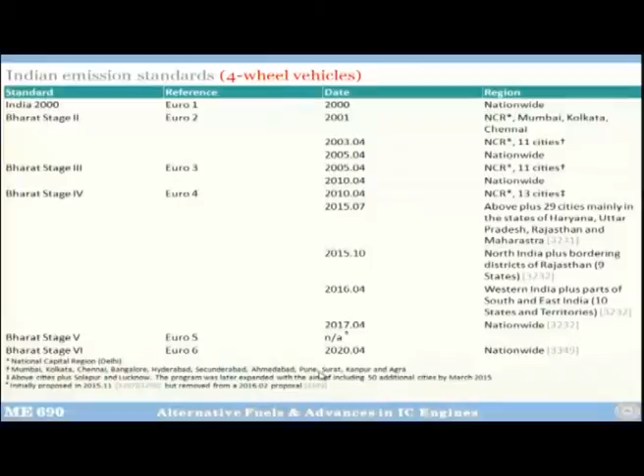So if you look at the cities—these 11 cities include Mumbai, Kolkata, Chennai, Kanpur, Agra—and then there were 13 cities. These cities plus Solapur plus Lucknow. So we were earlier than Lucknow. Okay, so this is as far as the four-wheeler program is concerned.

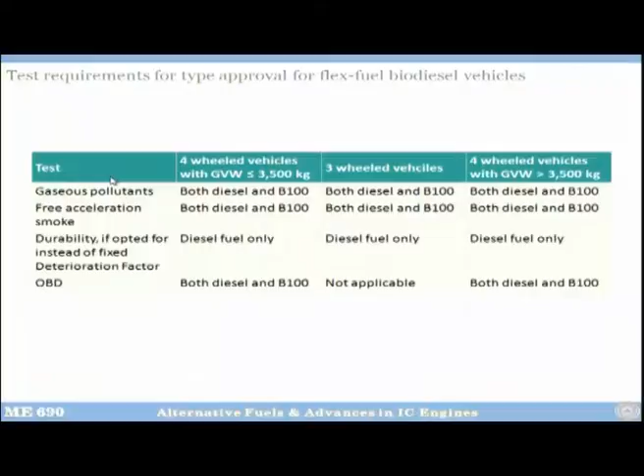Now, test requirements for type approval for flex fuel vehicles. Type approval means that before vehicles are put into the field, certain tests are done: gaseous pollutant tests, free acceleration smoke test, durability test if opted instead of fixed deterioration factor, and onboard diagnostics. For four-wheelers, if it's a flex fuel biodiesel vehicle with weight less than 3,500 kilograms, it was tested for biodiesel and diesel, with durability test done only on diesel and OBD on both.

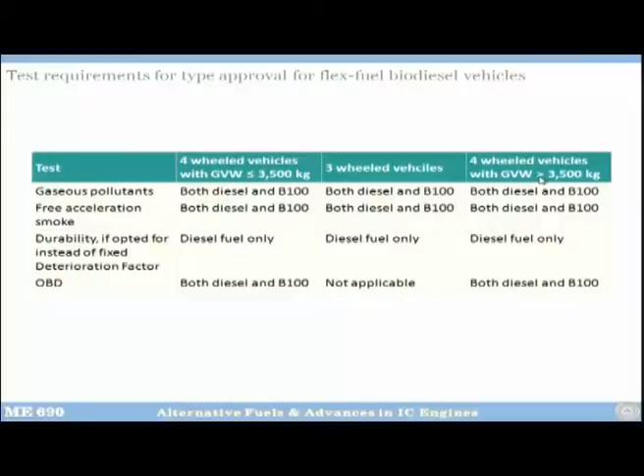For three-wheelers, only two tests were done for diesel and biodiesel, with durability done only for diesel, and OBD was not applicable. For four-wheelers with gross vehicle weight more than 3,500 kg, three tests were done on diesel and biodiesel, and durability was done on diesel. So this is the type approval test. It's not of great academic interest, but in the automotive industry you will hear this term 'type approval test' all the time, so I thought I would introduce you to it.

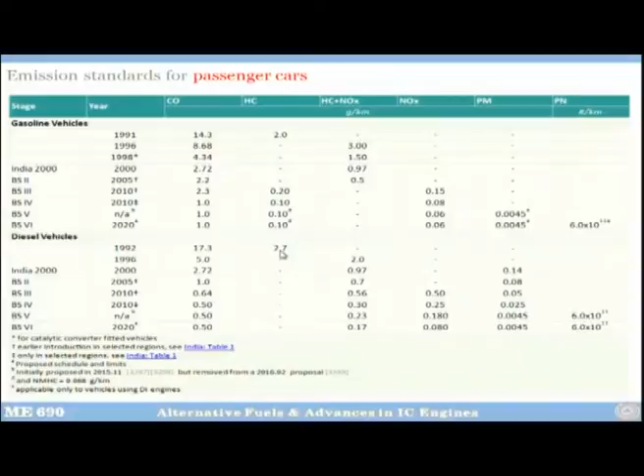Look at diesel: this is 1992, 17.3 and 2.7. In '96 you reduce it to 5 and HC plus NOx is 2. In 2000, 2.72 and 0.97, and this is particulate matter 0.14 gram per kilometer.

This is BS2, reduced to less than half, anyway it is a very small number, and this reduced to 0.7, this you reduce to about half. 2010 BS3: 0.64, 0.05, you see this reduced to a very low level, and BS4: 0.5, 0.3, 0.25 and 0.025.

And BS6, same CO, HC/CO is not a problem anyway with diesel, very small numbers. HC plus NOx is 0.17, NOx is 0.080, so very small number, 0.5 to 0.80, and this is 0.0045, and here also particulate number is introduced.

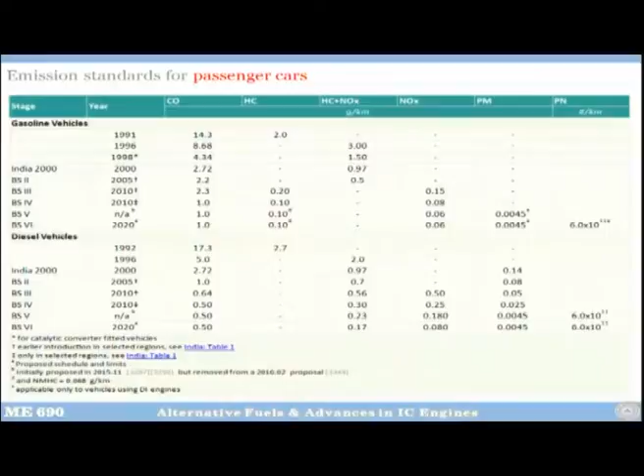So this is what is going to give a lot of problems and create a lot of jobs in the automotive industry, these numbers. You can imagine the kind of challenge Indian OEMs have to face just by looking at this table, and you can also appreciate what kind of technological interventions will be required to meet these numbers.

And we are talking of an economy segment which contributes more than 15% of the GDP of this country. Emission standards for 2 and 3 wheelers were effective in 1991, and since then they have progressively become more and more tightened. Now, emission standards for 2 and 3 wheel vehicles through stage BS III are summarized in the following table.

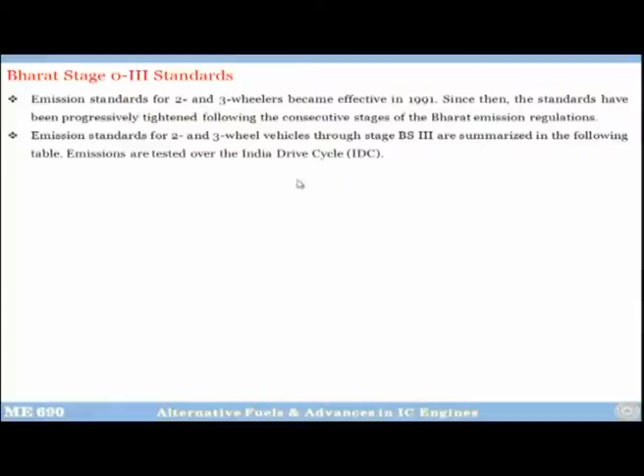Then in April 2010 we implemented Bharat Stage 4. These were adopted in July 2014 and became effective in July 2014. We tightened the HC and NOx limits, and harmonization of the testing was done.

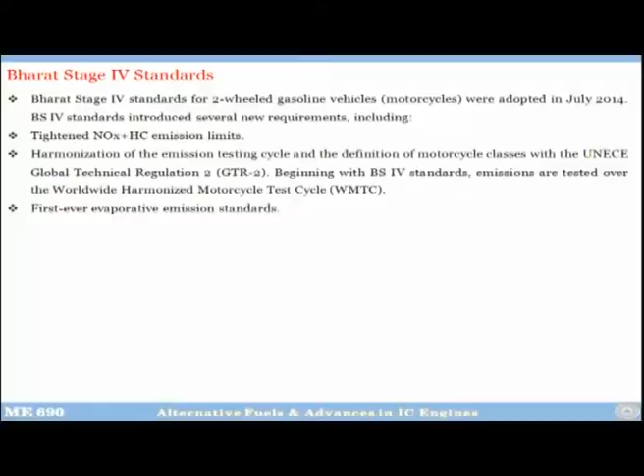There is something called the Worldwide Harmonized Motorcycle Test Cycle, WMTC or WHTC, which was developed, and the first ever evaporative emission standards were developed by India. Evaporative emission standard means whatever emissions go out when you fill the tank. So the emission standards even for those were developed in India.

In BS4, we did classification of the vehicles, for example based on the CC, the cubic capacity of the cylinder. So less than 50, between 50 and 150 cc, with maximum velocity of 50 kilometers an hour, or displacement less than 150 cc with vehicle speed between 50 and 100 kilometer, is called class 1.

Similarly, class 2-1 is vehicles smaller than 150 cc with velocity between 100 and 115 kilometer, or displacement more than 150 cc with velocity less than 115 kilometers an hour. This was class 2-1. Similarly there's class 2-2, class 3-1, and class 3-2. So these were the vehicles and the test cycles for each of them.

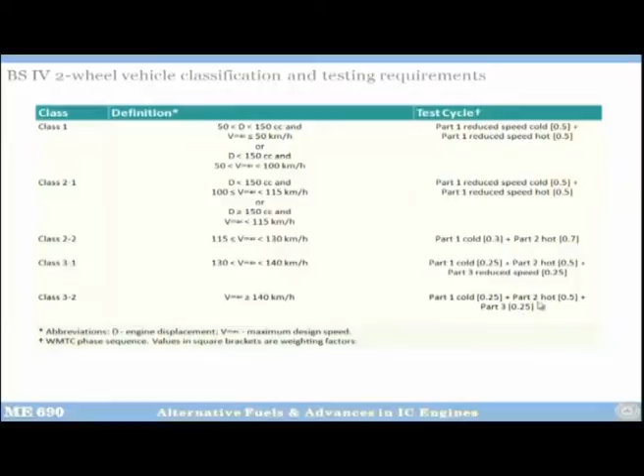I have not put the details, but there are different types of test cycles that were developed, and if you want you can find them on the internet to see what these test cycles are and how it is done. I just wanted to give you a feel of how it is measured.

Similarly, Bharat Stage 6 is going to be implemented in April 2020 for two-wheelers and three-wheelers. These are the emission standards both for spark ignition vehicles as well as compression ignition vehicles, and the regulations are on carbon monoxide, hydrocarbons, non-methane hydrocarbons, oxides of nitrogen, and particulate matter.

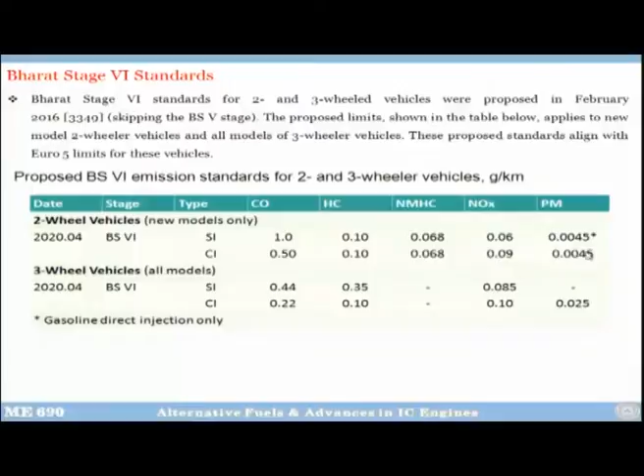Three-wheeler vehicles do not have emission norms on non-methane hydrocarbon, and spark ignition does not have norms on particulates, but others do. In three-wheelers, the emission norm for particulates in two-wheelers is only on the GDI vehicle, because the PFI vehicle does not really produce any particulates. So this is only for GDI engine equipped two-wheelers.

For heavy duty vehicles, these are the test protocols: ECE R49, the 13 mode test that I showed you, the European stationary cycle, the European transient cycle, and the world harmonized cycle. So all these numbers are given.

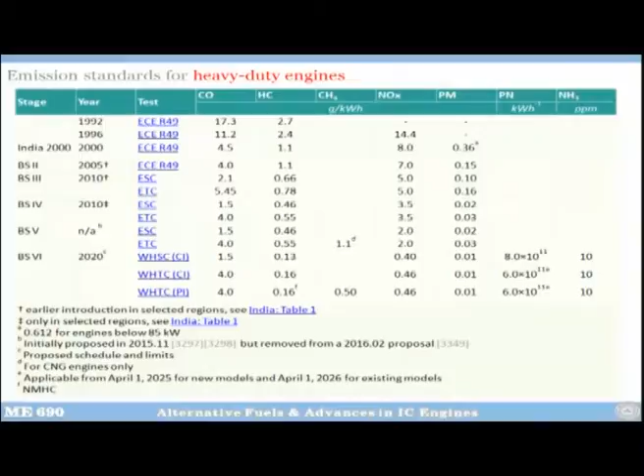For heavy duty vehicles, in 2020 with BS6, the most important change is that a new regulation on the particulate number is coming. In India right now, very few facilities are available which can measure particulate number. We were the first in the country to measure particulate number and size distribution, way back 7-8 years, and we are still the best.

This is for diesel construction machinery and commercial vehicles. The engine power output is shown here: less than 8 kilowatt, 8 to 19 kilowatt, 19 to 37, 37 to 75, 75 to 130. So construction machinery is classified based on the power of the engine, and all the dates of implementation are given for the emission norms.

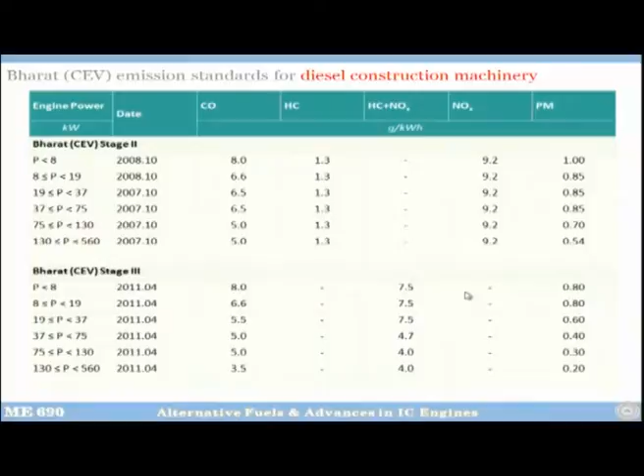Bharat Stage 2 norms were implemented on these days, and Bharat Stage 3 norms were implemented on these days. These are the norms for carbon monoxide, hydrocarbons, NOx, and particulate matter. You can see that this number is a little lighter, this one is more tighter.

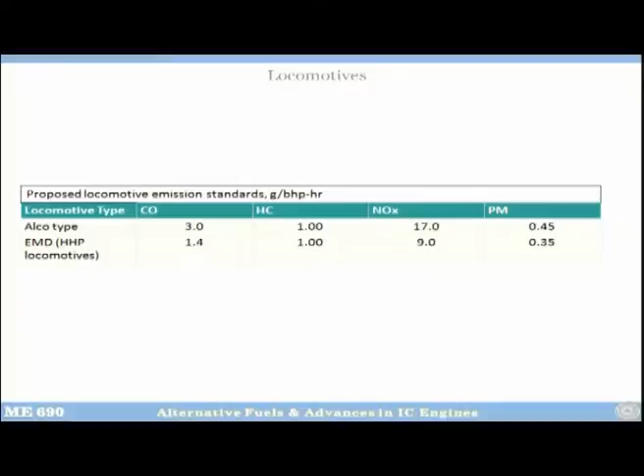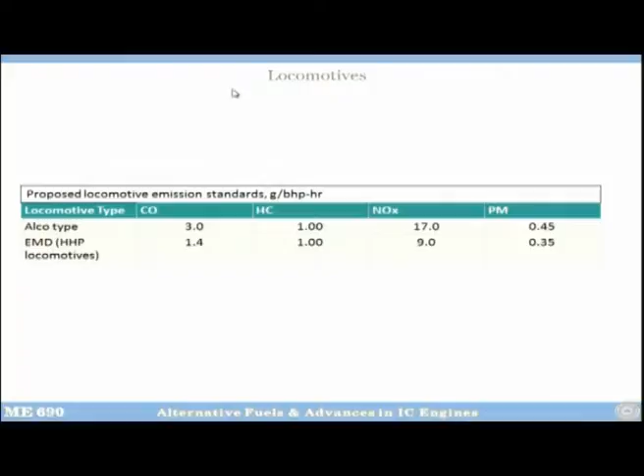Similarly, for locomotives, right now in India, who makes the locomotive? Government. Who makes the emission norms? Government. Who gives the oil? Government. So therefore the government has not put a bell in its own neck so far. There are no emission norms on locomotives as of now. They are putting a bell in everybody else's neck, but with a lot of pressure from different quarters, including the National Green Tribunal, locomotive emission standards are now also on the anvil.

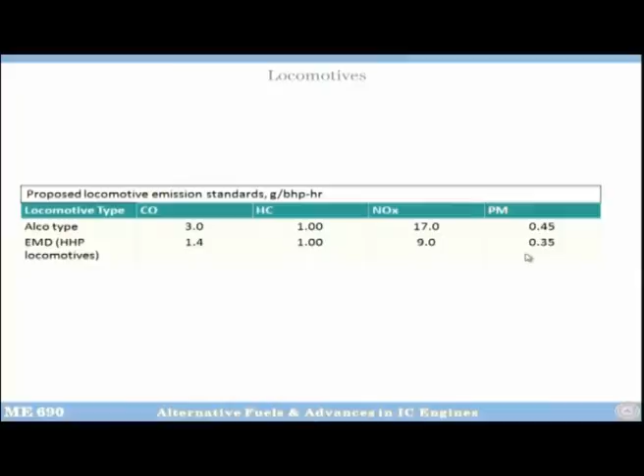So, these are the proposed locomotive emission norms, based on US tier norms actually. ALCO types and EMD types, and these are the numbers that are being talked about. This is still proposed, not adopted. Hopefully they will be adopted. We are also a stakeholder in these norms.

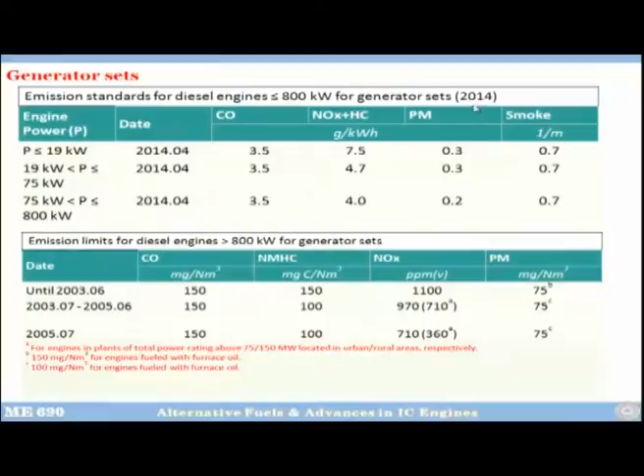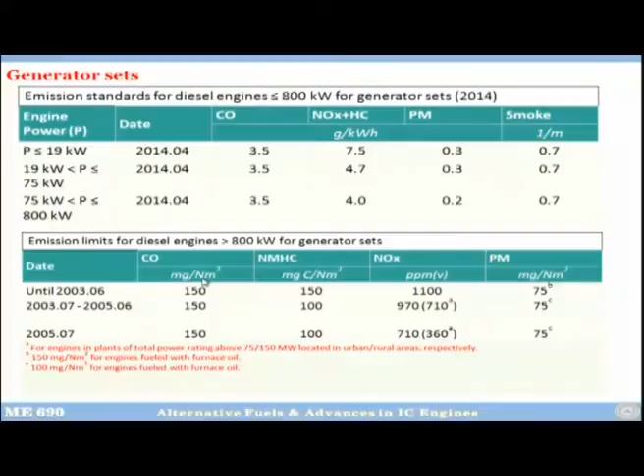For these, the standards are from 2004 or 5, implementation date was in 2014, and these are the emission norms: CO, HC, NOx, PM and smoke. Similarly, this is the norm for generators more than 800 kilowatt and less than 800 kilowatt. So this is the next norm for 2014, just implemented, for more than 800 kilowatt. Basically, these kinds of gensets are used for illuminating townships which are isolated from the grid.

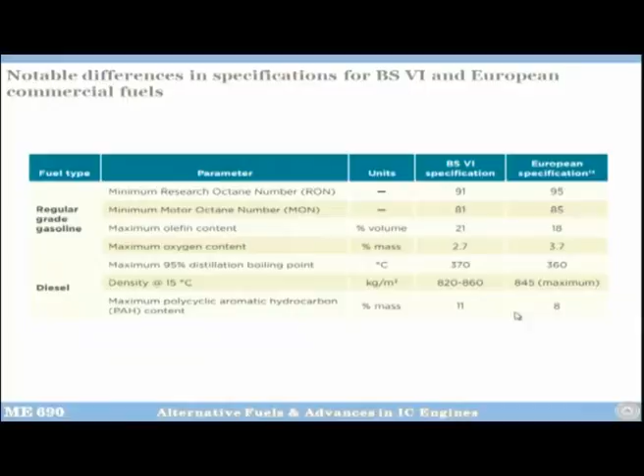There is also a lot of change in the fuels. I will give you one simple example of BS6 fuel compared to European fuel that is available. In Europe you have research octane number of 95, but BS6 says 91. Motor octane number there is 85, here it is 81. Maximum olefin content in Europe is 18, here it is 21% allowed. Maximum oxygen content allowed there is 3.7, here it is 2.7. Distillation point there is 360, this is 370. Density there is 845, here it is 820 to 860. And maximum PAH content in the fuel there is 8%, and here it is up to 11%. So there are certain specifications that are out.

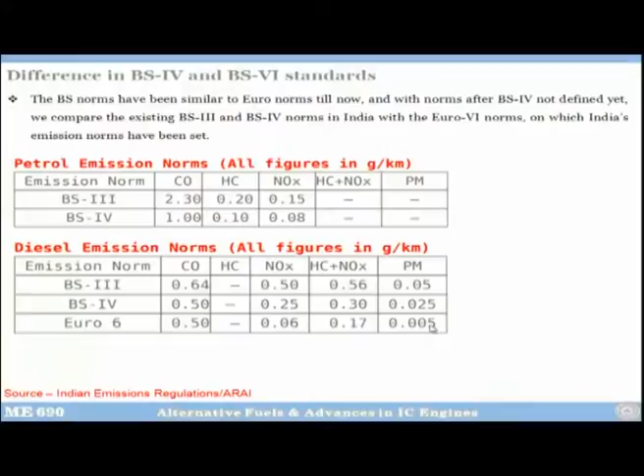This is also very important - why is the industry resisting? There is a lot of resistance in the automotive industry, and there is a lot of resistance in the oil industry. And I doubt seriously, in my personal opinion, I doubt whether the government will be able to implement it by 2020 because of the resistance. Only 2.5 years, and I do not see anybody being ready as of now.

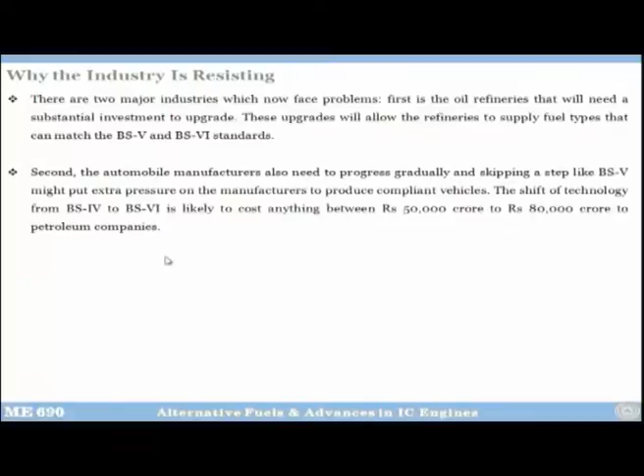So there are two major industries which face the problem. First is the oil refinery, that will need to make substantial investment to upgrade the fuel specs. These upgrades will allow the refineries to supply the fuel type that can match the BS6 standards. Second is the automotive manufacturers, and obviously they have to optimize the combustion, but more importantly they have to look at all kinds of after-treatment systems. Skipping a stage like BS5 put extra pressure on the manufacturer. They thought it would make it easy, but no, it will make it more difficult, because now they have to jump 2 steps. So they have to produce compliant vehicles. The shift in technology from BS4 to BS6 is likely to cost anything like between 50 to 80,000 crore to the petroleum companies alone, and for OEMs it will be even more.

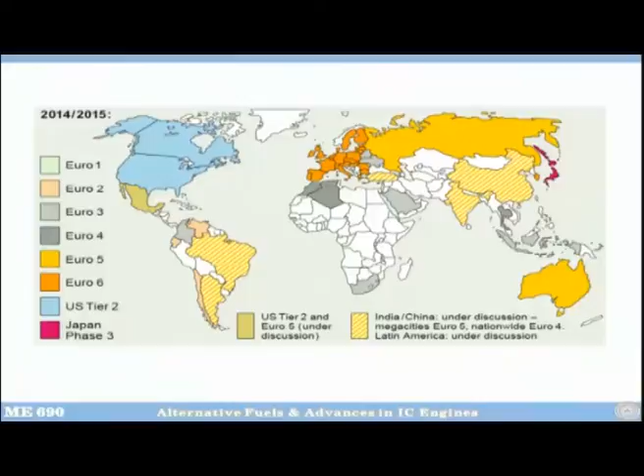You can see this scene here. Who cares? The population density is so low and the temperatures are so high that whatever you emit goes into the environment in no time. Anyway, they are putting in so much fuel and their evaporative emissions are so high, and petrol is cheaper than water. So nobody cares about any of these emissions.

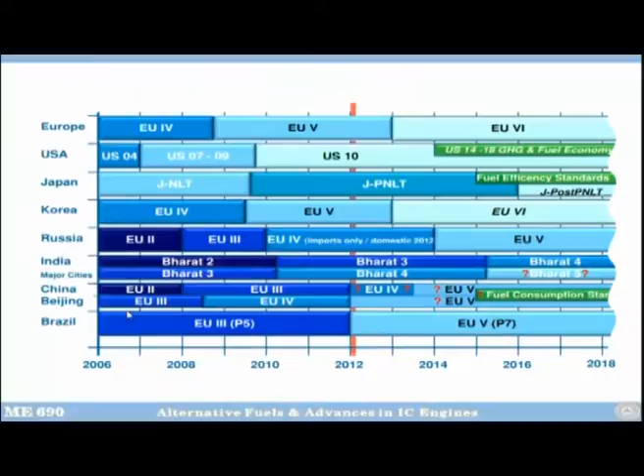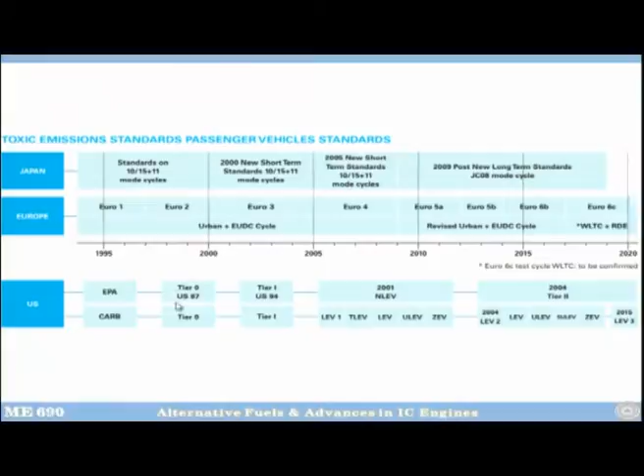This is probably the last slide. It shows toxic emission standards on passenger vehicles - this is Japan, Europe and US. It shows the years of how it was implemented. So the EPA standard started, then Tier 0 and US 87 came into picture, Tier 1 94 came here - it was equivalent to Euro 3.

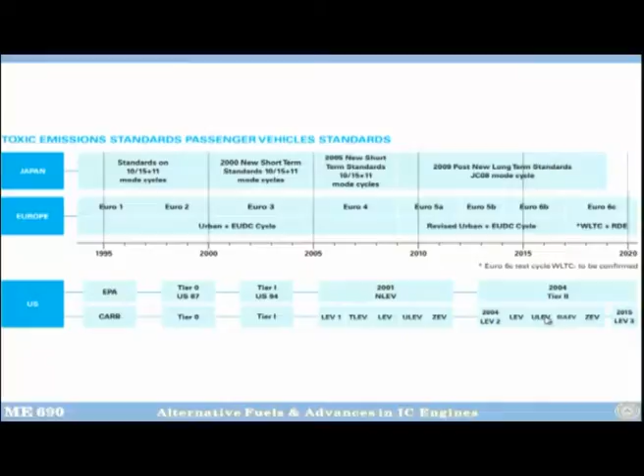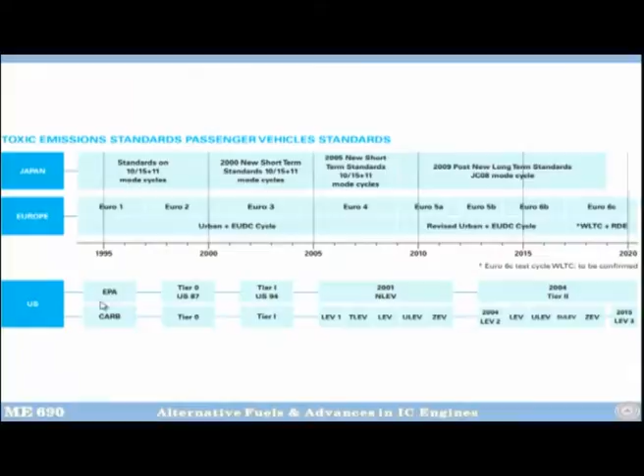In Japan these were the standards. So it just shows how the contemporary standards changed in Japan, Europe and US, because these are the lead countries actually which are showing the path to the rest of the world, how to make emission norms or how to develop engine technology to meet those emission norms.

So, as we know, what is a fuel additive? Fuel additive is any liquid that is added to a fuel which is either supplied to the engine or vehicle, basically for doing a particular task with a particular objective. These are compounds that are formulated - not naturally occurring - they are formulated to enhance the quality and efficiency of the fuel used in automobiles.

For example, the objective can be to increase the octane rating. We very well know that in former times, before the 1990s, there used to be tetraethyl lead that was added to increase the octane rating. Similarly, now there are more harmless additives that are added.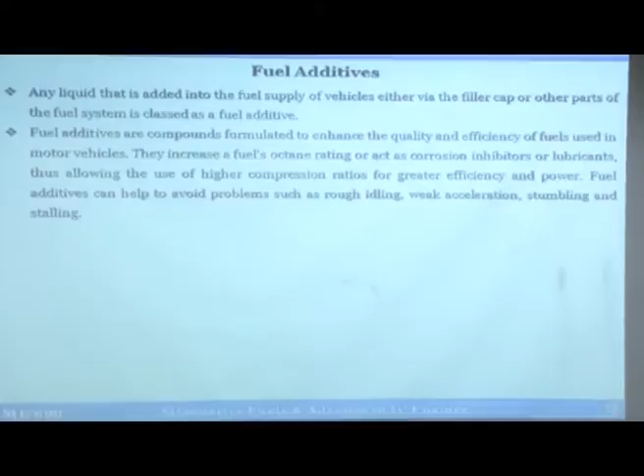There could be corrosion inhibitors - so in the fuel line, whatever components you have, the corrosion should not take place. And basically the additives help increase the octane rating, so that you can use higher compression ratios and get higher efficiency and power. This also helps avoid problems of rough idling, weak acceleration, stumbling or stalling of the engine. So to avoid this, there are many additives that are added.

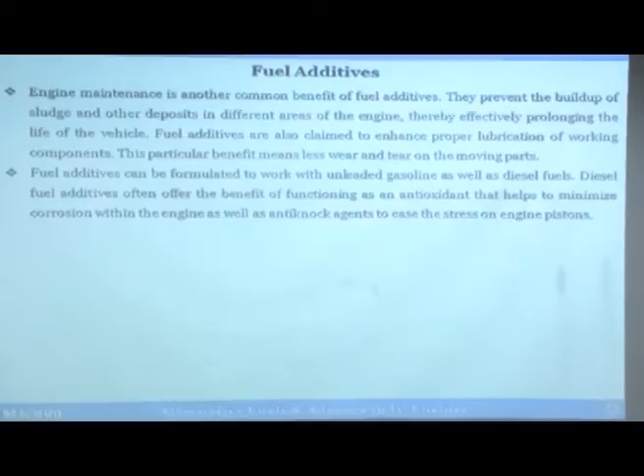Then the other objective is that engine maintenance is a very serious issue. So if somehow you can reduce engine maintenance by adding some additives to the fuel, that will be great. So engine maintenance can also be reduced by using additives. There are also some additives which are helpful in engine maintenance - they are effective in prolonging the life of the vehicle and the gap between the two services.

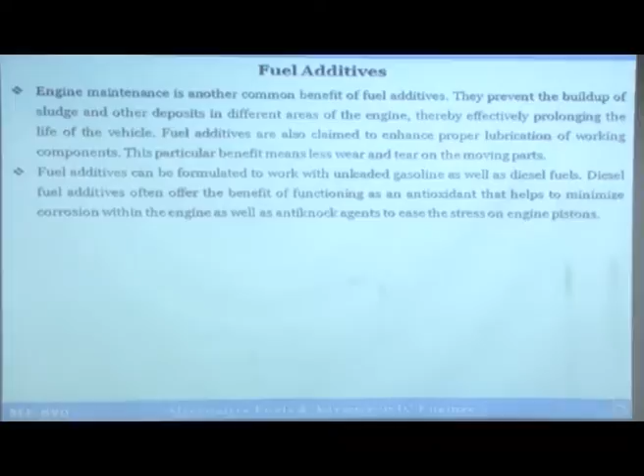Fuel additives are also claimed to enhance power, for gasoline as well as diesel. Diesel additives offer the function of antioxidants that help minimize corrosion inside the engine, as well as anti-knock agents to ease the stress on the piston, and reduce sludge - any deposit on the cylinder walls or piston top, they tend to take care of. They control soot formation, improve combustion inside the engine, and act as a biocide.

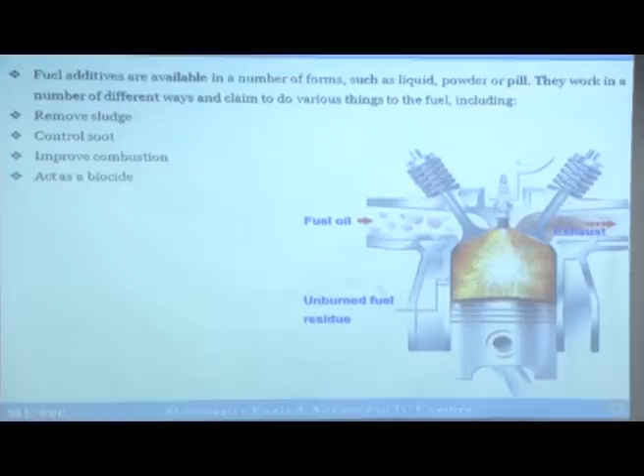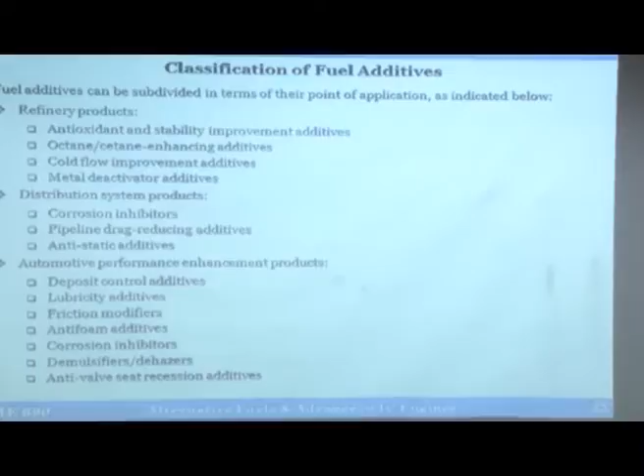What about their point of application, where they are applied? For example, there could be refinery product additives, distribution system additives, and automotive performance enhancement additives. If we look at refinery additives, we add antioxidant and stability improvement additives. Stability improvement and antioxidant - you all know that if there is any attack of oxygen on the fuel, polymerization and oxidation happens.

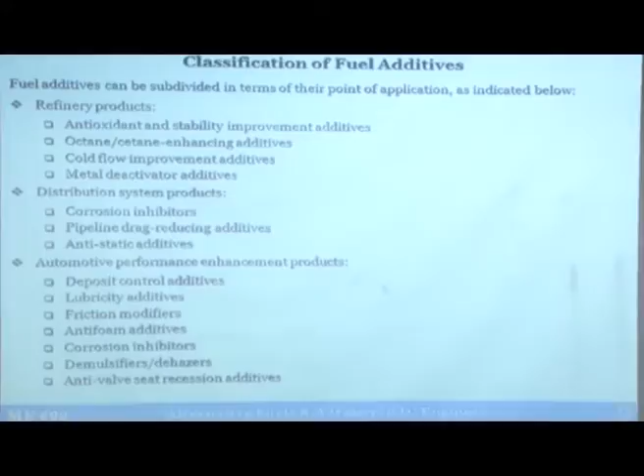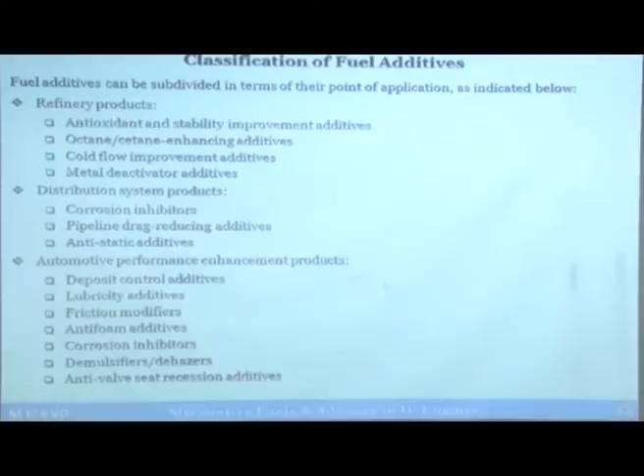So, you need to add some additives which can prevent the oxidation of fuel molecules. And then you should also improve cold flow properties. In Kanpur you probably do not need to worry about cold flow problems, because you hardly get temperatures below 0 degree centigrade. But if you look at regions like Kashmir or higher reaches of the Himalayas and Ladakh, half the time of the year the temperature is below 0, and fuel always has some traces of moisture.

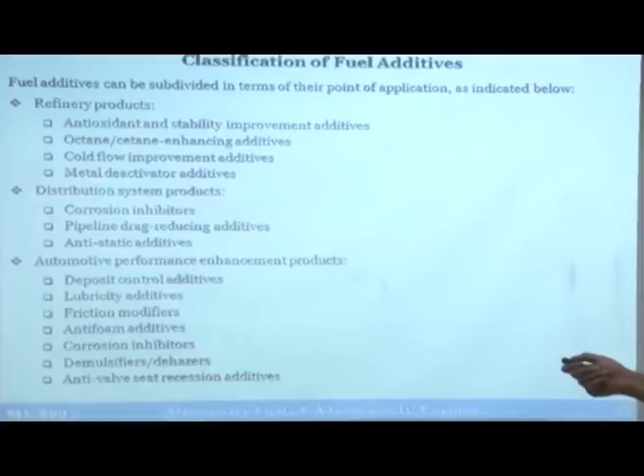Similarly, if you look at the distribution system, distribution is done through pipelines over long distances, from refinery to all the distribution centers, and corrosion products can creep into the fuel. So corrosion inhibitors are added. Then there are pipeline drag reducing agents, because when the fluid flows through the pipeline, it creates a lot of drag, so additives are added for that.

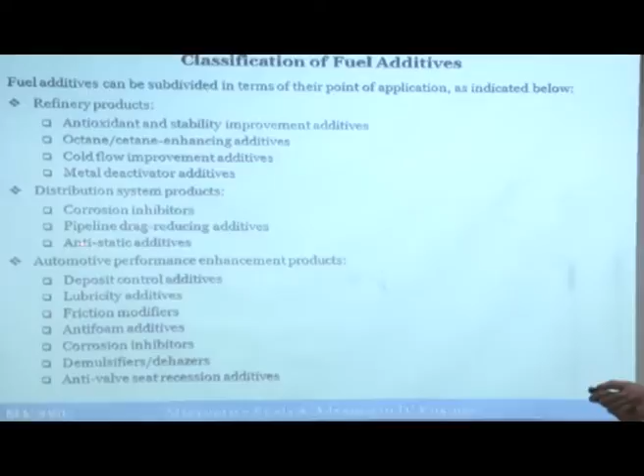Anti-static additives: in the winter time you accumulate a lot of static charge. You must have seen static in clothes as well, for example a polyester cloth where you experience the charge. Now, this charge, when you touch something, creates a spark, and unfortunately this spark is sufficient to ignite a fuel-air mixture. If that happens, there will be a catastrophe. So in order to avoid this, anti-static additives are added to the fuel.

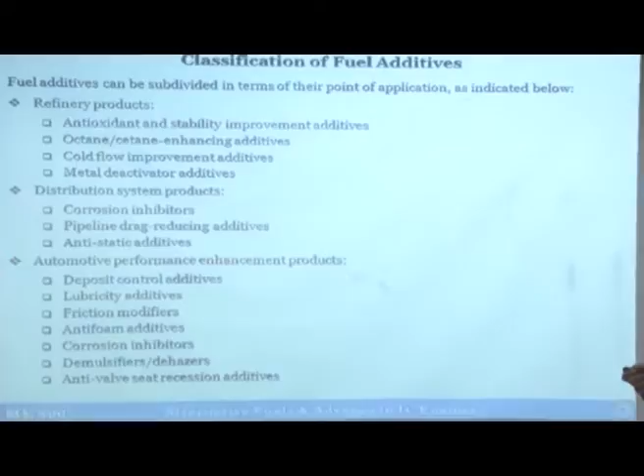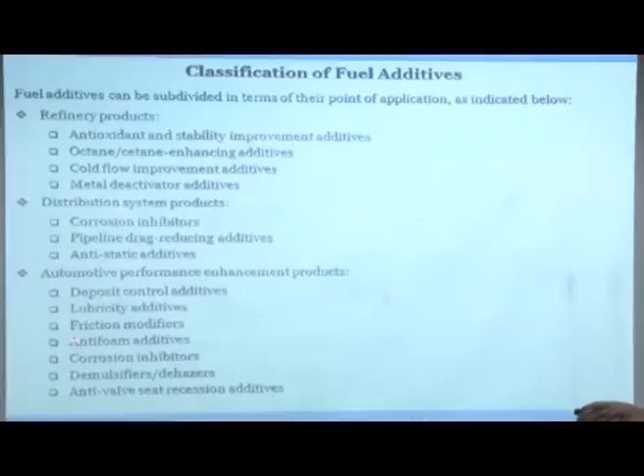Similarly, there are many additives for the performance of automobiles, for example deposit control additives and lubricity additives. In diesel engines particularly, the fuel pump and fuel injector have no special lubrication; the fuel itself acts as a lubricant. So lubricity additives provide the necessary lubrication for the fuel pump and fuel injector, especially in high pressure, high fuel injection pressure diesel engines.

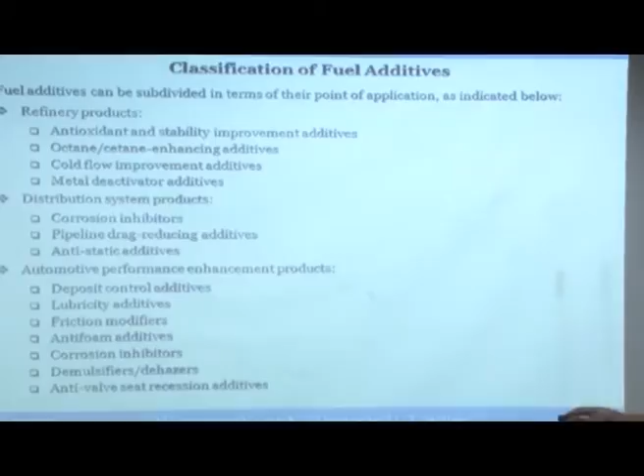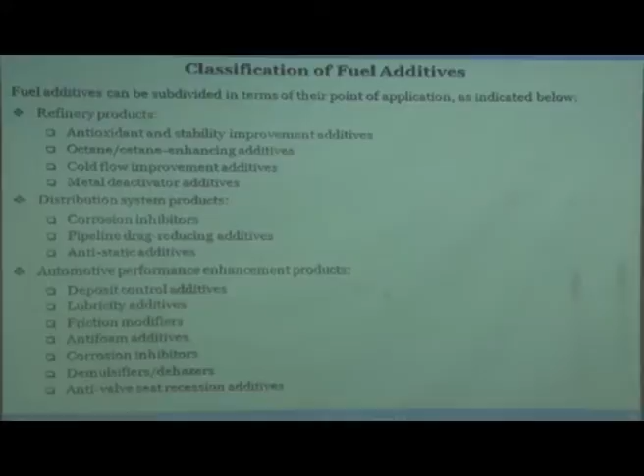Friction modifiers are used to reduce friction inside the engine. Anti-foam additives are extremely important, just like in lubricating oils, because if the fuel undergoes foam formation, there will be huge exposure to oxygen, and oxidation will accelerate. So you do not allow foam formation in fuel. You must have seen that petrol and diesel you buy never have foam formation; bubble formation is actually less than in water.

Corrosion inhibitors obviously prevent corrosion under high temperature, high pressure conditions. Demulsifiers or dehazers: if there is water present, they separate the water out. Anti-valve seat recession additives are something to do with valve seat recession.

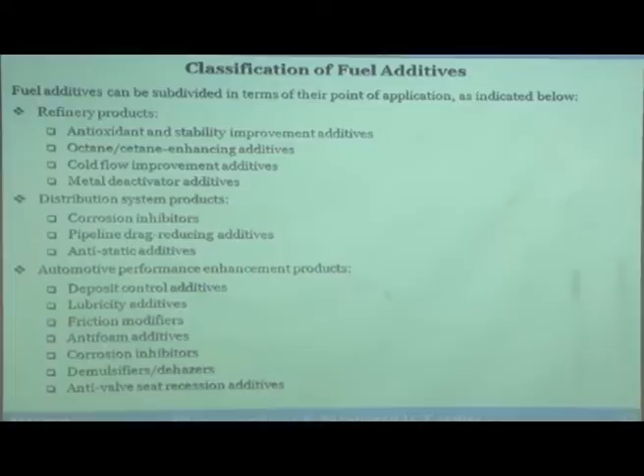You also see oxygenated chemical compounds added as additives to the fuel, where oxygen is part of the chemical structure; these are usually referred to as oxygenated fuels. You want some amount of oxygen in the fuel so that the formation of carbon monoxide and hydrocarbons can be reduced. Oxygenates are usually employed in gasoline additives to reduce carbon monoxide and also the soot created during combustion. These commonly used oxygenates are either alcohols or ethers.

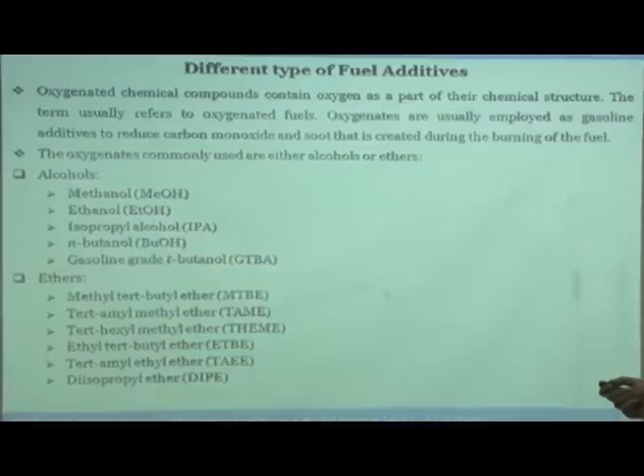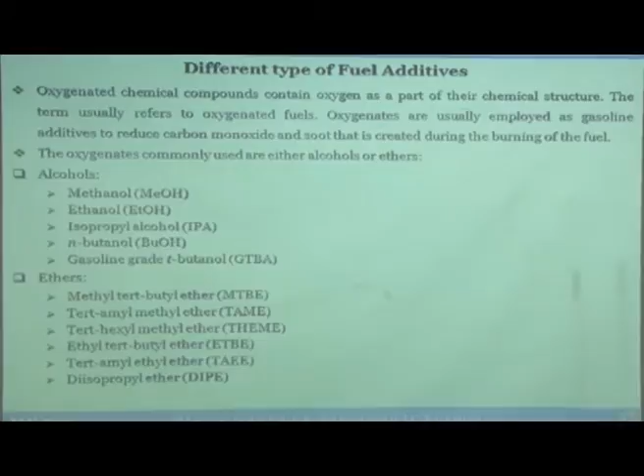Methanol, ethanol, isopropyl alcohol, normal butanol, and gasoline grade tertiary butanol, GTBA - MeOH, EtOH, IPA, BuOH, GTBA. Fancy names are given, but ultimately these are alcohols with 1, 2, 3, 4 carbon chain lengths, that's it, with some oxygen present. So when you add them, you are doing two things: replacing hydrocarbon or fossil energy with more bioenergy, since most of them are bio-produced, and also putting oxygen into the fuel, and therefore you emit lesser amounts of carbon monoxide and hydrocarbons.

Similarly, ethers - this is methyl tertiary butyl ether, MTBE, a very important anti-knock additive added to gasoline.

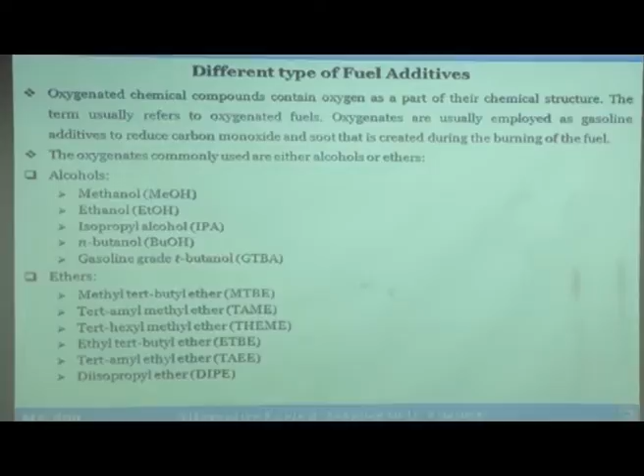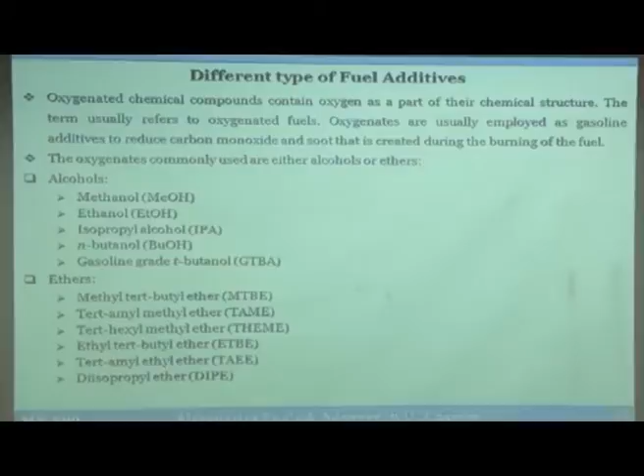Then similarly, TAME (tertiary amyl methyl ether), tertiary hexyl methyl ether, ethyl tertiary butyl ether (ETBE), tertiary amyl ethyl ether (TAEE), and diisopropyl ether. Okay, very frightening names, but these are all ethers. Ethers mean there is carbon to carbon bonding, and in between them there will be an oxygen group. So if there are two methyl groups, there is one oxygen in between. There is no direct chain; the carbon chain is broken with oxygen in between. Okay, so these are the...

Oxygenated additives. Similarly, there are antioxidants and stabilizers. They are used to terminate the oxidation reactions which take place during different weather conditions.

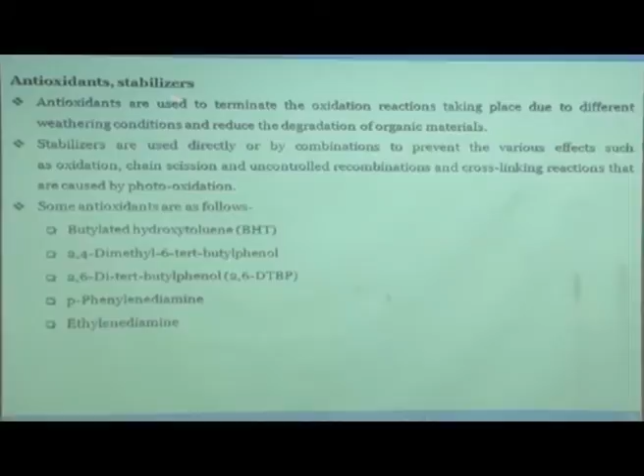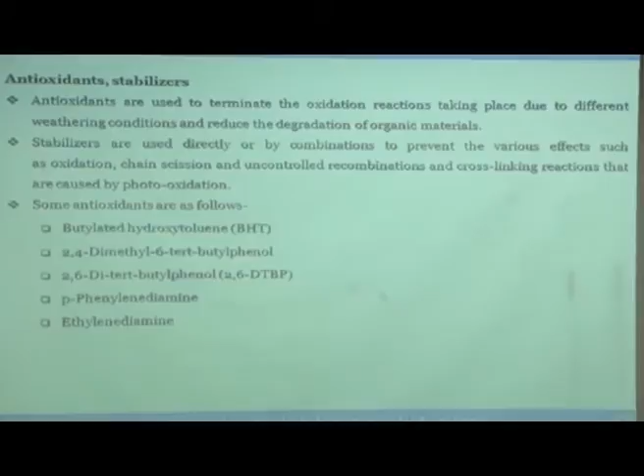Once oxidation happens, the hydrocarbons will create different organic substances and the degradation of the hydrocarbons will take place, which will change the quality and properties of the fuel. So these stabilizers are used directly or in combination to prevent various effects such as oxidation, chain scission, and uncontrolled recombination or cross-linking reactions caused by photooxidation, due to the effect of sunlight, environmental factors, and high temperature conditions.

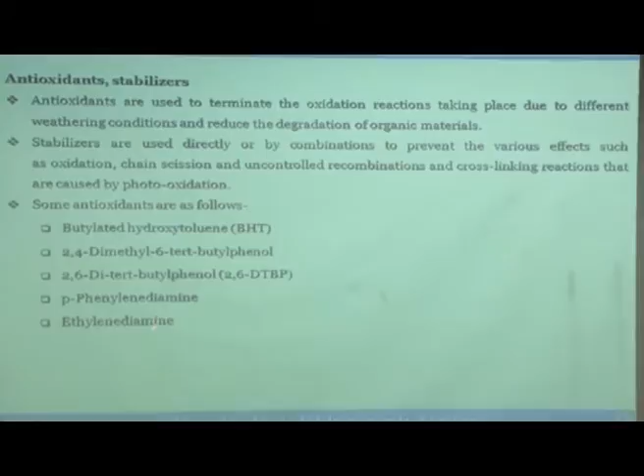Many of these things happen which you do not have any control over. So in order to stop these, you add antioxidants like BHT - 2,4-dimethyl-6-tertiary-butyl phenol, 2,6-di... You do not need to remember this, but these are some of the chemicals used as fuel additives. Different companies use either one or a combination of them for achieving their objectives. And this is a very, very big industry because every liter of gasoline or diesel that you buy will have some of this.

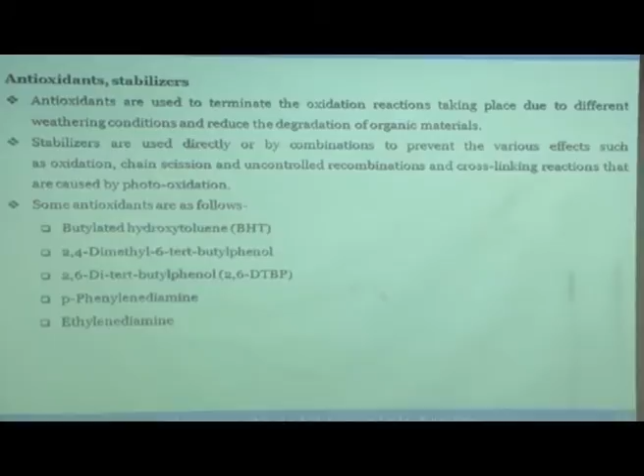You may not know about it. It may have some of it depending on what kind of environmental conditions are there in the localized region where the gasoline or diesel is sold. Even the concentration can vary from zone to zone. For example, Kashmir and Ladakh will have a different concentration, Kanpur may be a different region, Jaisalmer may have a different concentration.

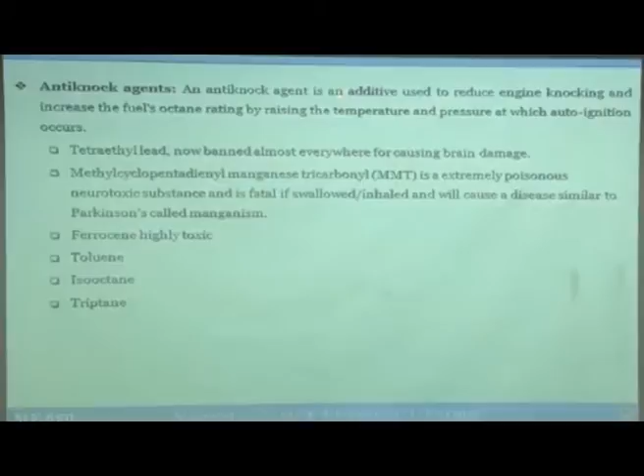Anti-knock agents are basically additives used for reducing knocking. They increase the fuel's octane rating by raising the pressure and temperature at which auto ignition takes place. TEL, tetraethyl lead, was used for a long time, but around 1990 we discovered that lead...

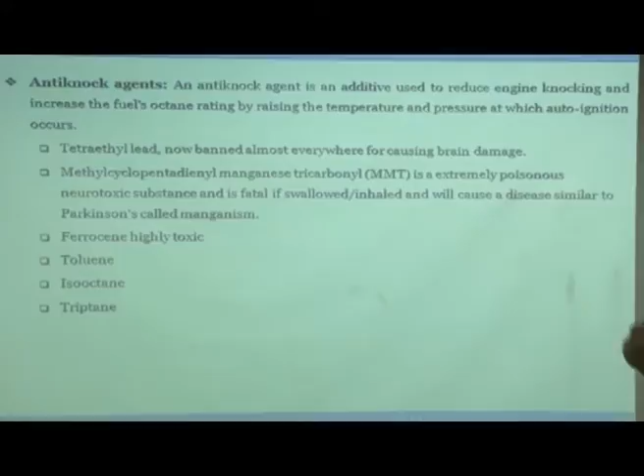Goes into the ambient environment, and then children inhale it, it enters their body, and it affects neurological development. So there were a lot of babies born around 1990 to 2000 who were mentally retarded in India. You must have seen around your families or neighborhood, lot of children were born like that, and that's because of the lead. It affects neurological development. And after the lead was taken out, this problem has kind of reduced quite a bit.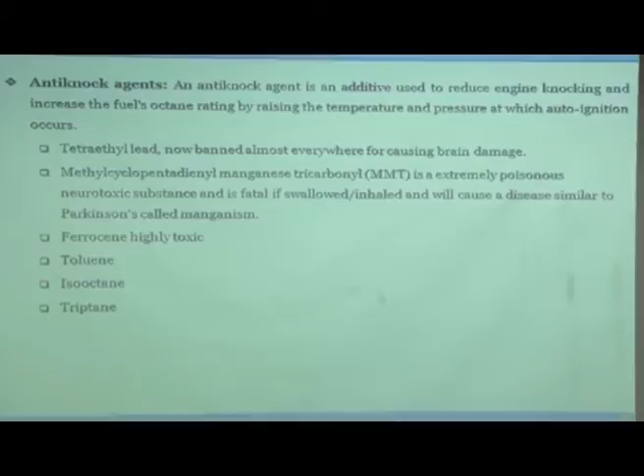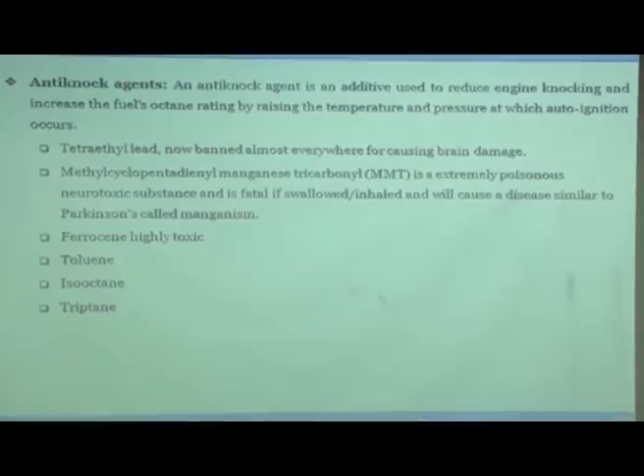This causes brain damage, particularly in children, though it affects adults too. Children are affected more because per unit body weight, children consume a much higher amount of oxygen, a much higher amount of air. So they are actually inhaling a higher dosage of whatever is in the environment, and that affects their brain development. So then there is MMT, another substance used as anti-knock.

It is extremely poisonous, a neurotoxic substance, fatal if swallowed or inhaled, and it causes a disease similar to Parkinson's called manganism. Ferrocene is used, which is also highly toxic, then toluene is used, isooctane is used, triptane is used.

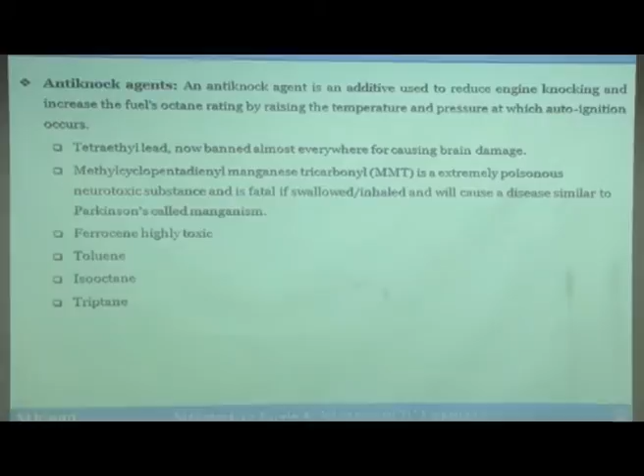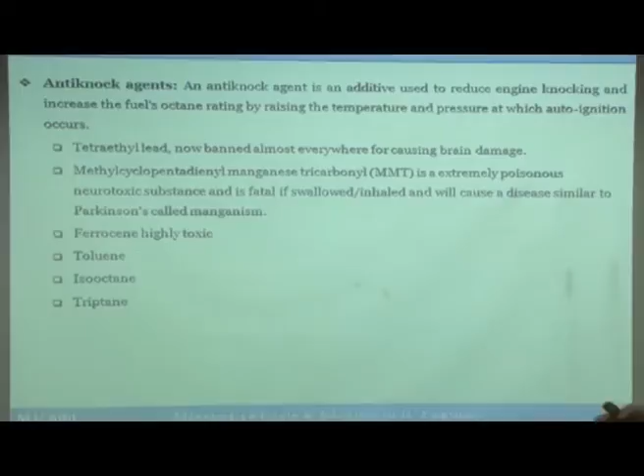So these are some of the additives, and this is a billions and billions of dollars industry. Normally it is a vicious cycle: they come up with one additive, they earn a lot of cash over 10 years, and then some scientists like us figure out that it is bad. They say sorry, we will develop another thing. They push another thing into the market, and then again after 10 years, when there is sufficient concentration in the atmosphere, they come up with another formulation.

Have you seen the movie Erin Brockovich? No? Please watch it and you will understand what I am talking about. It is a Julia Roberts movie. Anyway.

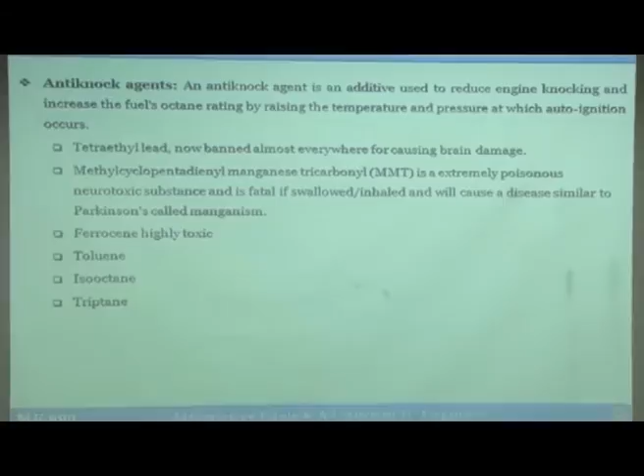So there are lead scavengers for leaded gasoline. Lead scavengers do not allow lead to come out. These are TCP, which is also an antiwear and extreme pressure additive.

1,2-dibromoethane and 1,2-dichloroethane are also used. Similarly, there are fuel dyes. Sometimes companies like to give color to the fuel, so there are different types of dyes in red, yellow and blue which are added for giving a particular color, so that you do not mix them with other fuels.

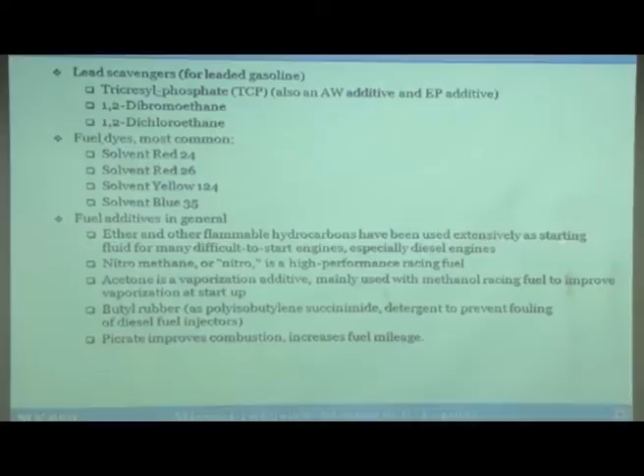Fuel additives in general, like ether and other flammable hydrocarbons, have been used extensively as starting fluid for many difficult-to-start engines, especially diesel engines. They start very easily because they have a very high cetane number.

Nitromethane, or nitro, you must have seen nitro engines for bikes. It is used as a high performance racing fuel for nitro bikes, and nitromethane is also used in small remote control cars.

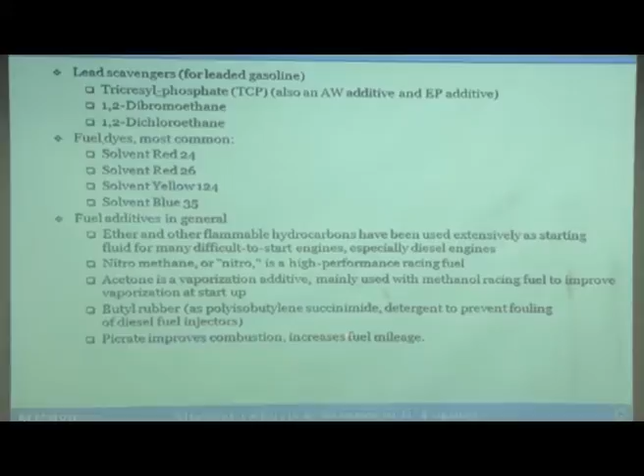Acetone is a vaporizing additive mainly used in methanol for racing fuel to improve vaporization for starting. Then there is butyl rubber, then picrate, which improves combustion and increases fuel mileage.

Then there is fuel line antifreeze, which I think I have discussed. You add some additives which lower the freezing temperature for the water, keeping it in liquid form. There are some additives which carry this water along with them to the engine, where it is injected. In the engine, it's a hot environment, so they vaporize and come out. This is the function of fuel line additives.

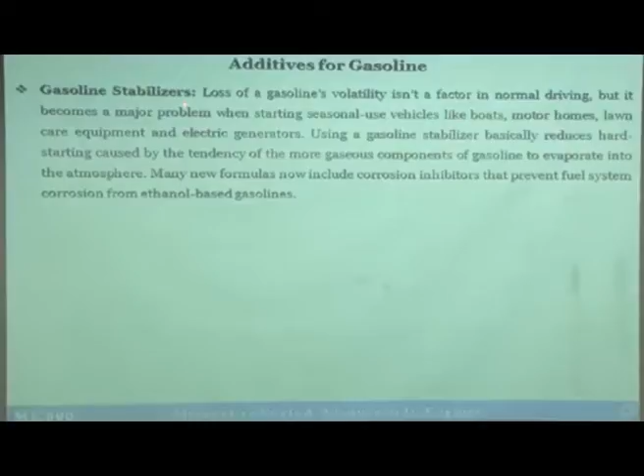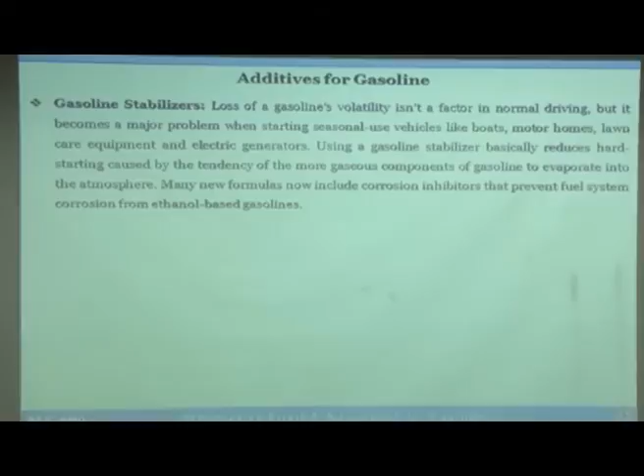Then there are gasoline stabilizers. What happens is there are some applications that are only seasonal, for example a boat. If you are a boat owner, you are not going to use the boat all the time, only during summer. Similarly, electric generators and lawn mowers are also used only once in a while.

But when you fill the gasoline and it stays in the environment, in a room or in the open, temperature goes up and down every day. So some of the lighter fractions actually evaporate, and only the heavier fraction of hydrocarbons remain in the tank. The lighter fraction somehow finds its way to escape into the environment. So when you want to start, the lighter fractions are not there, and the engine will be hard to start. So to avoid this, gasoline stabilizers are added. They prevent the evaporation of lighter fractions and help the engine start quickly without much difficulty.

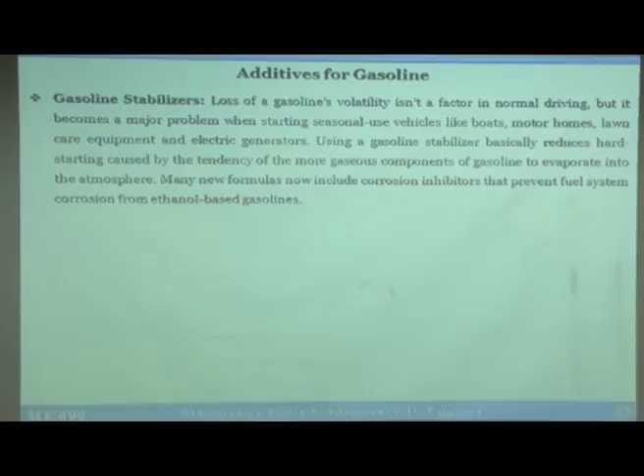Similarly, there are octane boosters. There are many octane boosters, and I think I have already discussed this octane enhancer, octane booster with you.

Similarly, there is one set of additives called fuel injector cleaners. Fuel injectors get some deposits of carbon because they work in a hot, high temperature environment. So basically these additives keep the surfaces clean. They remove heavy carbon deposits from the cylinder head, valves, pistons, and the fuel injector, and make the engine run smoothly.

Then there are upper cylinder lubricants for the top part. This is not very important; it is mostly for older engines.

Then there is diesel exhaust fluid. It isn't really a fuel additive, but it's important to understand how it's used. Diesel exhaust fluid is metered from a separate tank in the vehicle directly into the diesel exhaust stream, basically it's a urea solution. When injected into the exhaust system, it breaks down into ammonia and carbon dioxide, and this ammonia reacts with the NOx present in the exhaust, converting it back into nitrogen and water. I'll talk more about it today.

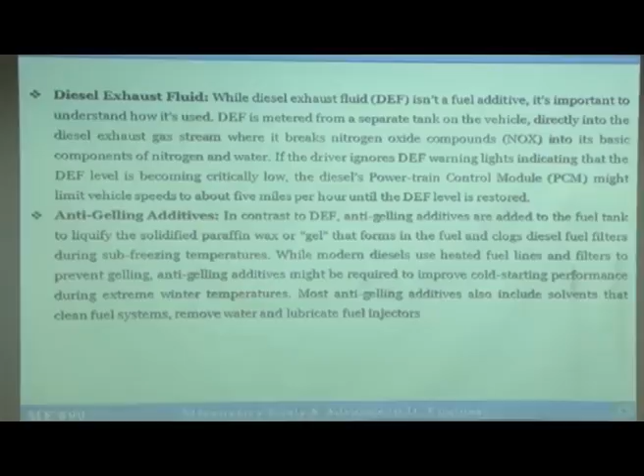Then there are anti-gelling agents. These are added to the fuel tank to liquefy the solidified paraffin wax or gel that forms in the fuel and clogs the diesel filters during sub-freezing temperatures. When temperatures go down quite a bit, some of the heavier hydrocarbons in the diesel start solidifying, while most other things remain in liquid, so gel formation starts. The function of anti-gelling additives is to stop this gel formation, because once it starts, the fuel viscosity will also increase. That is avoided by anti-gelling additives.